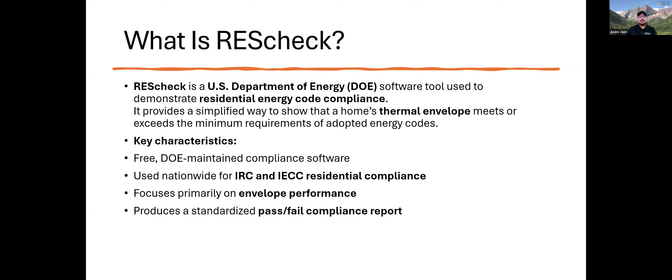So, the history of ResCheck, let's start here. It's been around for quite some time, believe it or not. So, the discussion about getting to a model energy code really starts all the way back as far as the 70s and the gas crisis in the United States, right around the time that we start realizing that energy production and energy conservation might be tools that we need as assets in the design world. And we had some groovy, forward-thinking architects, engineers that started to put together one of the first manuals on that, and that came in the form of ASHRAE Standard 90.

Later on, there was a model energy code adopted in the 80s, 90s that became the document that we sort of had today as the prototyping that occurred during the previous organizations that represented what now is the International Code Council, where you get your code books from today for the most part. The original one developed into the 1997 Model Energy Code with MECcheck, right? So that's kind of the basis of how far back this reaches. It's been around for quite some time.

Yeah. How does it work? Well, like I said, it does some analysis for you. And what that analysis is doing is a UA trade-off. So what it's doing is demonstrating a comparative analysis between two houses, one designed to the parameters of a code, another designed basically as proposed. And we're going to compare those two, and that's what the box on the right is telling you about.

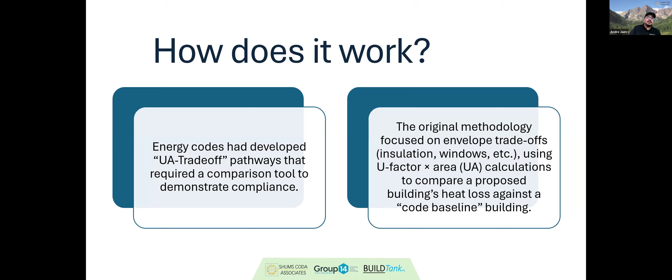It's developing this methodology for trade-offs, and using all of the things that are components of the thermal envelope. So this can be insulation, windows, a number of different components here that all come together through an analysis of their U factor, which is basically their thermal conductance, right? We'll look at that a little bit later as we look at the 24 code as well. And the square footage or the area that that represents on the total building. And this represents a comparison between a proposed building and a code baseline building at a mathematical level.

So in November of 2002, MECcheck was renamed ResCheck to better align with the residential nature of the tool and sort of separate that ResCheck ComCheck designation that I was talking about earlier. So we get these two tools now that are being produced by our Department of Energy and providing resources for us to demonstrate compliance in both residential and commercial construction. And as we look at it longitudinally since 2002, a number of changes have been made.

This used to be a desktop-oriented software that you had to download and you'd use. You'd have to update or replace, depending on which version you were looking at. And now we have a web-based platform that's significantly easier to use. It can integrate more features. And we see that just as the code has evolved over time, so too has this software.

So in looking at that with a little bit of longitude here, here's a little of what that summary looks like. ResCheck has been around since the early 90s in the Building Energy Codes program. So this is what they labeled it as when they were starting to put this together and really get this moving. By 1998, we're seeing that, hey, this is being more widely used, and we're starting to develop this UA trade-off based message. In 2000, we get the change from the MEC to the IECC, and we start working off of that as our base energy code, especially on the residential side, right?

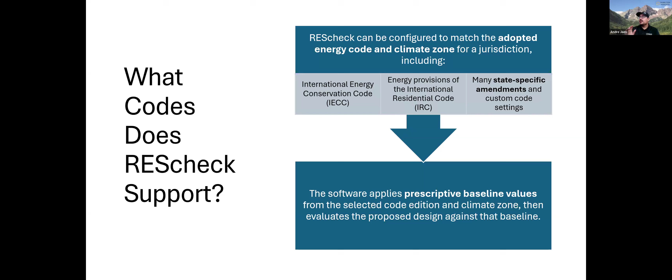And then many state-specific amendments have, like I said, filtered their way into what ResCheck does to broaden the scope of its ability to support a number of different codes and a number of different uses in the residential market. And so it's applying those prescriptive baseline values from the selected code edition and climate zone against a proposed value.

So it was designed with multiple compliance paths in order to afford flexibility. So what do we mean by that? Well, we know that compliance paths exist in the energy code, and I've got a nice little breakdown of that a little bit further on in the presentation. But typically, we refer to this as part of the component performance alternative method. We've had that for a long time. Sometimes it's referred to as something like a UA trade-off method.

This basically is just saying the same thing: we're going to compare a baseline building with provisions of the code. If we were going to say, hey, I want to change this a little bit, I don't want to do as much insulation in the ceiling, I want to do less insulation in the walls, so I'm going to make up for it in some other place, but I'm going to do that in a way that is limited to the thermal envelope. And generally speaking, that's an acceptable method through multiple different codes.

Sometimes there's more expansion of that, and we get into things like ERI and simulated building performance, where now we're looking at the total energy use of the building, not just the performance of the thermal envelope in and of itself. So when we get to the 24 edition, though, we see this idea of TC or thermal conductance beyond simple U factor analysis, which is being presented for the 24 codes. So what does that mean exactly? What is UA versus TC?

Well, UA has been the term that we've been using for the overall evaluation of U factor. And now the 24 code is replacing that with a term known as thermal conductance, which is meant to capture a more complex definition and include more of the problem places where we've had more leakage and more conduction of heat out of a building than we were intending. This also includes the ability to look at things like slab loss.

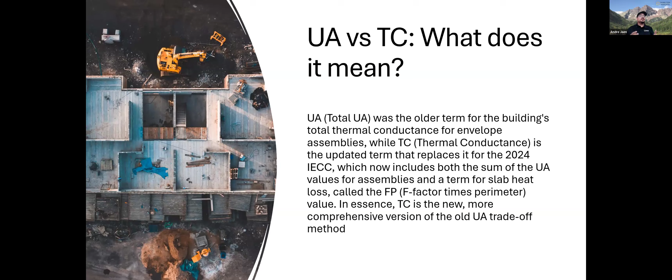TC is now meant to provide a new comprehensive version of this old concept, which is: can we compare the thermal envelopes of two buildings, like for like, and say one is going to perform as adequately as the other? So, one of the other things we want to mention here is that the IECC scoping provisions do hold for this. Remember, we're talking about low-rise residential buildings, multifamily buildings up to 3 stories. Really want to detangle that from the ComCheck narrative, especially for designers that might not be used to designing on the energy code side.

Remember that the scoping of your commercial building design can include things like R2s, and you'd usually build that out of the Blue Book, the IBC. You might still be able to provide the residential application of the provisions of the code for those particular units if it's under 3 stories. So it's an important one to keep in mind that those scoping lines don't always line up. We want to make sure we're paying attention to those as we figure out how to apply things like a software or the code in the correct method.

And it's going to verify the compliance through the envelope trade-offs. So it's going to look at the walls, the ceilings, the floors, the doors, and we're going to see that each of those is independently itemized in the report of a RESCheck. So we can look over that with our set of plans and make sure they planned for this wall to be 2x6 construction with, say, an R19 cavity and maybe an R5 insulation on the exterior, and that is the same thing they show on the RESCheck report. So we're going to see that compliance documented in multiple places when we use this method.

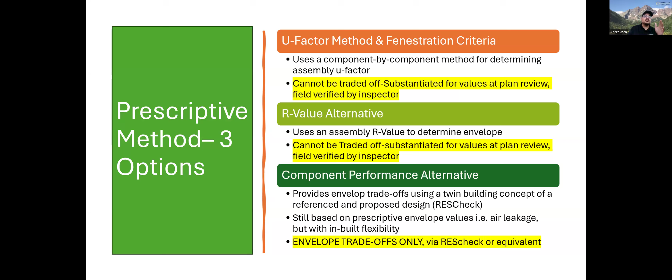So when you can get designers who are putting, hey, I'm going the prescriptive method, U factor method, or R value alternative, right? Great. Then I know I'm not looking for an additional report. I'm not looking for a RESCheck from you, and I'm reviewing directly to what is in the book, right? If there's any variance in those things, then I know that I have something that might be a problem we need to address. Whereas if it just says prescriptive, I don't know if I should be anticipating a RESCheck until I start diving into your plans. So, just keep in mind that whatever compliance method we pick is going to directly correlate to what items we're going to ask for as we move along in the process.

So, how does this process work with RESCheck? Well, there are a number of user inputs. There are project details. You have to select what code edition you're going to use. You have to tell us about your building components. And remember, there are a lot of those. Thankfully, though, they take the time to prefabricate a lot of different typical framing methods, typical building methods, so that way we can focus on the realities of what's out there rather than having to make everything from scratch and explain what the U factor is for each of these. It does a really good job of helping you find some of those things. And then fenestration, skylight, and door details as well. So basically everything in the thermal envelope.

And then the tool automatically is going to calculate that difference between total UA proposed versus total UA maximum to determine compliance in a pass-fail method. So it's a UA trade-off based approach. Each building has a U factor, or effectively a rate of heat loss, and each assembly also has to have an area. So we'll notice that when we look at assemblies, we will see each time how much of the square footage this particular assembly is going to take up, right? How much of this is being calculated into this building.

Some of the places where we see things kind of go wrong on that: you have a residential building with a parapet. That parapet wall might be part of the wall assembly and easily mistaken to be calculated into the thermal envelope, even though the height of that wall, maybe 2, 3, 4 feet, doesn't actually contribute to anything within the thermal envelope, right? That's all stopped at the ceiling level. So there are places where we want to make sure that those are aligned and that we're paying close attention to. But the software calculates a heat loss value for the code minimum design and then the proposed design and compares those two.

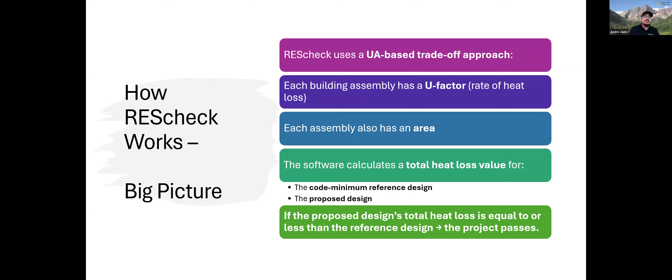So if I am beating a dead horse, there is good reason for it. I want to be perfectly clear about exactly what this allows. I've got a couple of slides a little further on that go into what RESCheck is not, but I always think it's important to break that down. So, what goes into this analysis overall? Well, we're going to make sure that it has its climate zone. You have to have the conditioned floor area, right? We need to know how much of a building we're talking about and how much we're going to be heating, how much is included in this space.

We need the number of stories, right? We need to know how tall this thing is. We need to know if it breaks the threshold over 3 stories, and then we can't apply this anymore. We need to know things like the foundation type. We need to know whether or not we're going to have slab edge insulation running down a footing and stem wall. Are we going to be going under a structural slab? Are we going to use a different type, a post-tension slab, for instance, things like that.

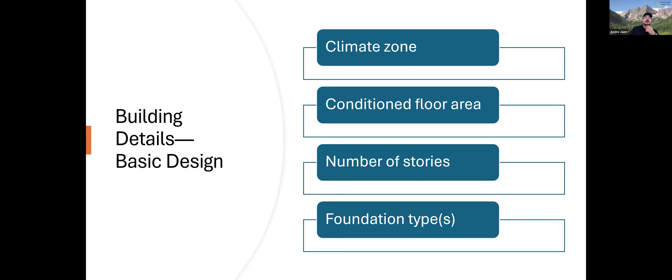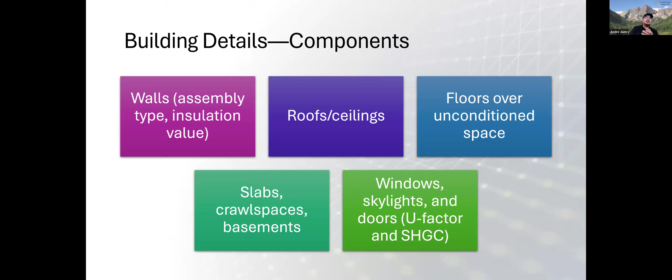We have to know a little bit about these details in order to be able to understand how ResCheck's going to apply. We need to know about our building components, our walls, our roofs, our floors, especially over unconditioned space where we're going to be insulating those, right? That's where the big differences matter. Slabs, crawl spaces, windows, skylights, and doors, everything that makes up the thermal envelope.

So like I said, there are a lot of questions that I get about ResCheck, especially for first-time users. Folks that are saying, hey, I am trying to understand this. I got modeling as part of ResCheck. Well, no, right? ResCheck does not provide or require full energy modeling, only enough detail to evaluate the envelope performance. It's not looking at mechanical sizing. It's not looking to verify HVAC sizing or efficiency.

Doesn't capture air leakage testing, right? That's a common one to potentially trade off on when you look at some really advanced building methods like passive house, things like that, that really get into limiting the amount of air leakage for a building. Doesn't look at lighting controls, right? Doesn't look at any of that good stuff. And this is probably my most important one, the last one. I wanted to end on a high note here.

It's not a substitute for the plans that you need. You want alignment between those two plans because I hate to say it, the guy building the building or the gal building the building out there typically is not looking for the ResCheck when they are cutting rafters or sizing up how their roof is going to frame up, right? They're looking at building plans. And ultimately, you need these in both places, right?

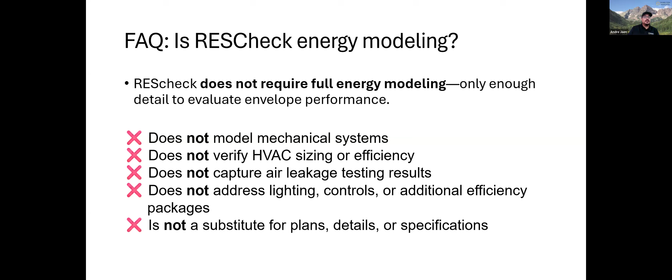You need the assemblies to be pictured in the plan so you know that they're built correctly and then simultaneously conveyed on the ResCheck itself so you know that they were analyzed for their energy performance correctly. So you want to see alignment between those two things. One is not a substitute for the other by any means. So what does it look like? Well, it looks a little something like this, right?

I know building departments that don't look at lot and block numbers. They look at that and say, absolutely not. And then I know some that are like, yeah, absolutely. We'll go look that up out of the plat, and that's perfectly fine. But building consistency here, or maybe raising this if somebody is doing a series of ResChecks for residential builds in your jurisdiction and you're looking at that pre-con opportunity to talk about expectations. If you want these labeled in an address-specific means, that's a great opportunity to have that discussion.

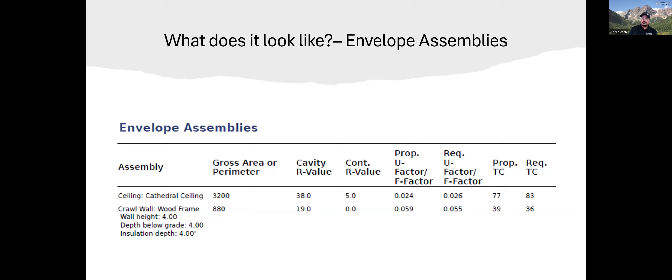Another cool feature is that it helps you tally up energy credits. That's an important thing here, especially looking at the 24 code, having an ability to say, okay, there are a number of items here that this building is going to check off the list for its crediting. In my case here, right, I said it'll be using an option 3 high performance gas furnace and cooling with a gas-fired water heater. That's also going to be high performance there.

We're going to do some energy efficient appliances, and in 5B, I still get a little credit for that. Demand responsive thermostat, right? This is another great one here. Easy enough to install. And then 100% of the ducts are going to be in the conditioned space. Well more than enough credits, right? So we see the 10 required for a home built like this, whereas the proposed crediting system would give me 21 credits for all of the things that we said on this REScheck that we'd be able to do.

This is, in my mind, a huge boon to be able to provide a report like this and a strategy for review on this topic, right? Because energy credits are intimidating. I think Erica made mention that there will be a two-part class out in the future for the IECC R408 crediting structure. And I get it. I get why. The movement to a more robust crediting system is definitely a little bit daunting. So a tool like this can really be helpful in understanding what's supposed to be on the plans. And again, aligning those things with the plans.

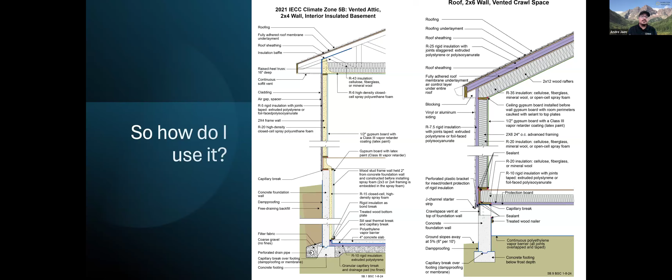And I think, to Astrid's point on this, some of the biggest issues we have with energy compliance, I would say, is a lot of existing buildings, a lot of folks not knowing how to draw energy, how to work with energy, especially those homeowners that are just focused on, hey, I just want to extend my dining room. That's the whole reason I'm here. And so being able to show them a list of options that's like, hey, any of these are compliant, you can do something else as well. And that's exactly where ResCheck comes in, right? Let's say that they want to get a little bit more creative about that.

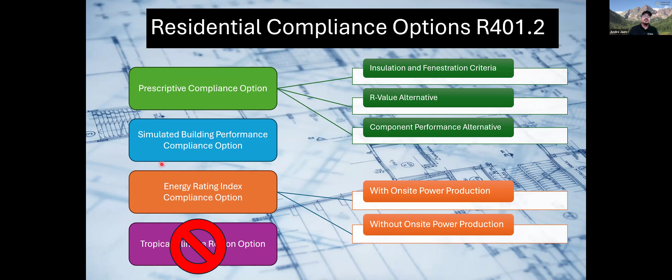You will find things like a simulated building performance option on the RESCheck software. And unfortunately, software can't provide the full depth of a simulated building performance, but it can provide parts of it, like the envelope analysis, right? You just have to combine that with other information. So I want to be very clear about kind of the limits of the software, what it can do, and what it can't.

So, the prescriptive method, getting back to part of this question, it's been around for a really long time and people know it well. And sometimes with energy, especially folks that don't work on this on a regular basis and are not trying to leverage all of the flexibility being written into the code, it can be information overload, right? They just want to hear a straight up, hey, tell me what to do. Just tell me, like, I can only frame this with a 2 by 8. I want to know the same thing for energy. I can only put an R30 in this, then I can move on, right?

There is a level of that I think exists out there that are just realities in working with people trying to do projects. And so with that, prescriptive method has been sort of tried and true and used for a very long time. It's why people really like it. And that's exactly why tools like ResCheck sought out to support specifically aspects of the prescriptive method. I've known some jurisdictions that just required a ResCheck for every project because it's free software, regardless of whether or not they were taking the component performance alternative.

Part of it was to itemize all of the insulation and energy compliance information that they wanted to get on the project. And I can understand the rationale behind it, but the versatility of the tool really does come from its use with the compliance path that's appropriate. It's great for additions, great for remodels, right? Like I said with Astrid, it absolutely does work for that. I just run into a lot of people that tend to want to use the prescriptive method, especially getting started.

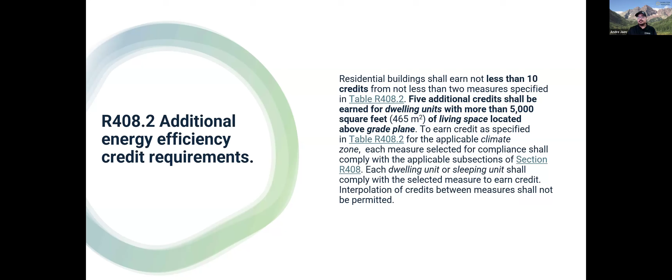But I do want to parse that out, that one of those tools being the additional efficiency requirements sort of list or report out of it. Super useful, but applicable only to certain code paths as well. So

ResCheck's especially useful for those simple projects, single families, townhomes, and providing a consistent and standardized compliance document that people learn how to read quickly and get effective with. It helps reduce errors from calculations, creates a clear compliance record, and helps reviewers quickly confirm envelope performance.

So, what does ResCheck mean for my process? And I think this is where a lot of our viewers, or a lot of the folks that attend these, want to know from a brass tacks perspective: how do I use ResCheck when I'm doing a plan review or doing an inspection, right? So first things first. If we're going to integrate this, we'll start on the left with plan review. We're going to make sure that it matches the compliance path that somebody has chosen, right?

If they're saying simulated building performance and they're just giving you a ResCheck, that's a red flag, right? That's a stop. That's a hold on a second here. This doesn't make sense. And again, it's a good reason to parse out which method they want to take, which prescriptive subcategory they want to take. Otherwise, then we start looking at the document. We say, okay, does the climate zone, floor area, building type all match?

Then we work through the assemblies. We start going through that and the plans and saying, okay, do these match for the amount of wall area that they're calculating, ceiling area for this? Can I fit the amount of insulation into the ceiling area that they're saying they're going to get in our ResCheck, right? Let's say that somebody decides to go with more ceiling insulation because they've got the room for it, but they want to really reduce the depth of their walls. It's a totally viable option, but again, we'd have to see that rightly configured on both of those.

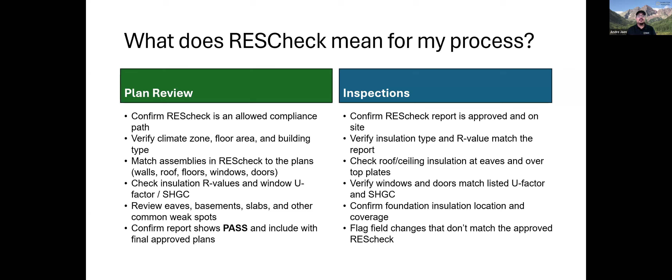So that's kind of the gist of impacts there. And so now I want to just take a quick digression and talk about something really quick here, which is, how do I use this thing? Like, how do we go about this? And the nice thing is that it's really easy to access. If you have not done this before, I strongly recommend that you do.

You go ahead and sign in. It has a nice little policy saying, hey, I accept the terms. I get to work with you. And then we have a couple of projects in here, like I said, that I've been tooling around with just for some fun. And so we can pull up exactly what's in each of these projects.

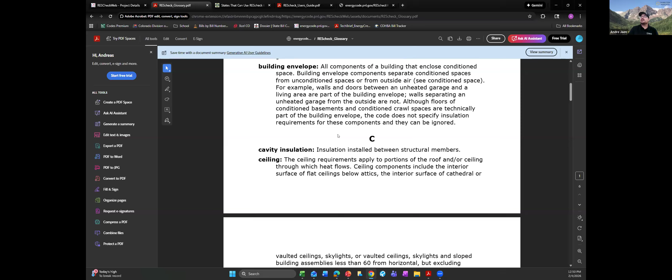The other things that they have on the website that I want to give you a heads up about, they have a great glossary out there. So if you're trying to learn how to speak energy effectively, or you get somebody who you're encouraging to use the software and they're saying, whoa, I don't know what half of this means. That's okay. Send them over here. Tell them, hey, give this a quick look. Look up the terms that you don't think you understand. This will help you figure out exactly what you're going through, especially on the residential side.

Something like a glossary can make conversation so much more fluid and build so much more confidence in getting compliance on both sides of the counter. There's a nice map of states that can and cannot use REScheck. Not too germane for Colorado here, but there are a number of places that run into that. So nice to have. There's also a full user's guide.

Now, this is pretty sweet. It's not too technically demanding, I would say, and it walks you through the process of going through and using a product like this. Last but not least, I won't show it, but there is also a video on, hey, so you need to do a REScheck. So if you are talking to somebody at the front counter and explaining, hey, what you want to do by code, I need you to produce this document. They're saying, I don't know how. The nice thing is, there is this out here.

It's an 8-minute video, does a phenomenal walkthrough on the basics of using the software, and can hopefully get somebody up to speed with what they feel comfortable with. So I wanted to take a little digression, do a quick little visit over to their website, and just let people know that this is a great place to go play around in when you have a few minutes of spare time.

The nice thing here is that you can see if you start building a project, you can show the breakdown of each assembly. You can play around with their sizing, their location. You can talk about the windows. Like I say, all of these can be changed for individual items that they already have pre-programmed in here. So it really does cover and capture a vast majority of typical construction methodologies.